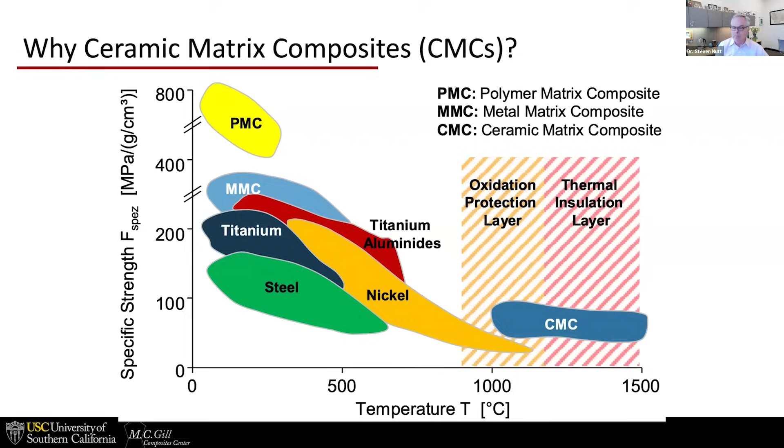And so high temperatures for one. That's one of the main motivators for considering ceramic composites. Now, the specific strength looks not too impressive relative to other material families, but that can be extended upwards at those service temperatures with protection layers, which I'll talk about downstream in this presentation.

All right. I remember many years ago, I worked with a fellow at what was then the United Technologies Research Center in Connecticut. His name was John Brennan. He's one of the early pioneers in ceramic composites. And I still remember, because he said it several times, with ceramic composites, the name of the game is fracture toughness. Ceramics are brittle. Everybody knows that. So they're never going to be used in many applications unless that limitation is addressed.

Now, yes, they're inert. They retain properties to high temperatures, but brittleness is a weakness, and environmental resistance is a plus. If one can impart fracture toughness, boost it even just a little, then that's a real game changer. There are various approaches to boosting fracture toughness with ceramic composites. Surprisingly, porosity is actually an approach, and I'll talk about that downstream as well.

But the most well-traveled approach is what we call weak interfaces. Tuning the fiber matrix interface so that it is strong enough to transfer load, but weak enough to debond and deflect cracks. And then also surface treatments can help boost both toughness and environmental resistance.

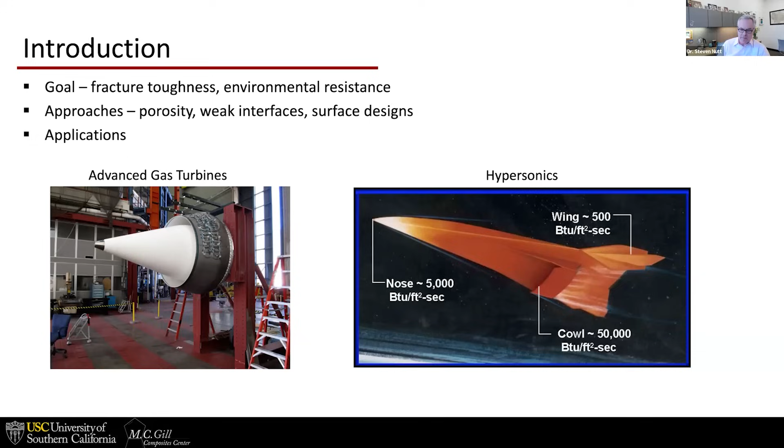I'll talk about applications. One of the best known applications are nozzles for gas turbine engines. The white component there is a ceramic composite. And boy, like gangbusters, the funding spigot has been turned on for hypersonic applications because, well, I think you all know the reason for that. These are vehicles that are going to require high temperature composites, including ceramic matrix composites. There's almost no other way around it. And we'll talk about more of those applications next.

Well, we talk just about applications. Everything sounds wonderful, but we have to also be honest and talk about the challenges and the problems. All right, the three main sectors I'm going to talk about are turbine engines, space applications, think rockets and rocket components, and hypersonics. Another comparison chart showing much the same thing, only this on the vertical axis is material surface temperature. And on the horizontal axis is the approximate time of use, meaning when these materials were introduced and became commonplace in applications.

If you're not familiar with some of those application acronyms: IMC is intermetallic compounds, TBC is thermal barrier coating, FGM is functionally gradient materials. I think everything else people can figure out themselves.

So you can see why there's interest in CMCs, because they're in the upper right of that chart. This is a well-traveled image.

I've used it many times myself. It's just a jaw-dropping example of a ceramic composite being used in the tail section of a turbine engine produced by GE. I'm not sure if it's the Passport or the LEAP engine, but it's called an exhaust gas mixer. You can see the geometric complexity of that part. It mixes bypass air with exhaust air, that's why it's called an exhaust gas mixer.

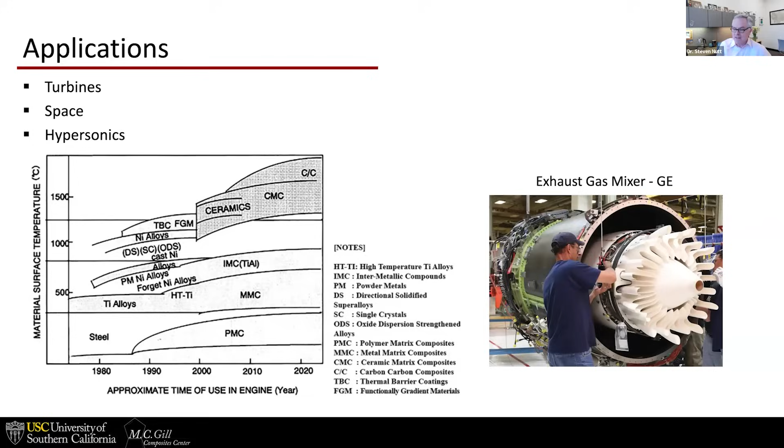That's an aluminum oxide composite—aluminum oxide fibers, aluminum oxide matrix. Produced here in Southern California, by the way. Composite Horizons makes that. We'll talk about the process by which they make it as well. That's kind of interesting.

There have been attempts to go farther than just the tail section of the engine and introduce ceramic composites into turbine blades. That is a bit of a challenge because of the toughness requirement. But this is from GE, and the yellow blades there are the ceramic composites, and they're yellow because of a coating on top of them.

More common in GE engines are other parts. This is the LEAP engine and a part called a shroud. These engines are extremely complicated, but basically there are a bunch of these shrouds that encircle the hot zone.

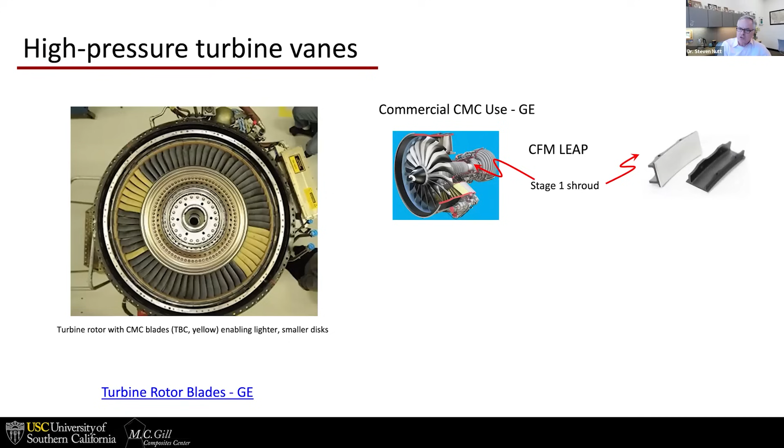This is another part called a combustor liner. So the name suggests, and the position in the engine suggests, these are in the hot zone of the engine. These are not in the warm or the cool zone—these are really in the hottest part.

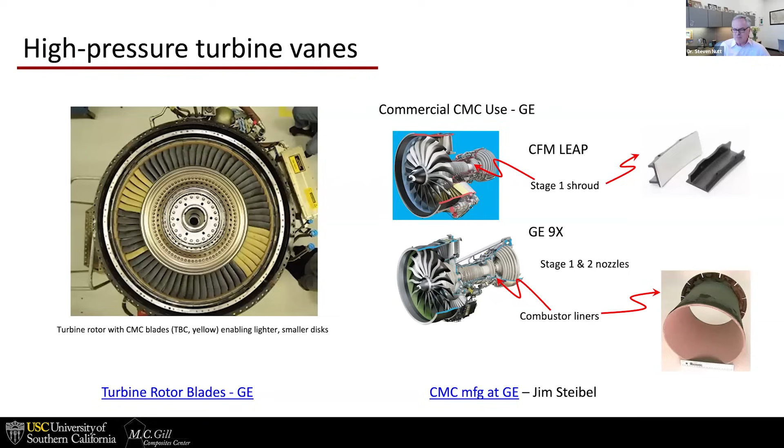GE has made hundreds of thousands of these parts, and they've flown their engines millions of miles. I say that because Jim Steibel said it. He gives a wonderful talk, by the way, and he's now retired, but he gave a nice overview talk of GE's use of ceramic composites.

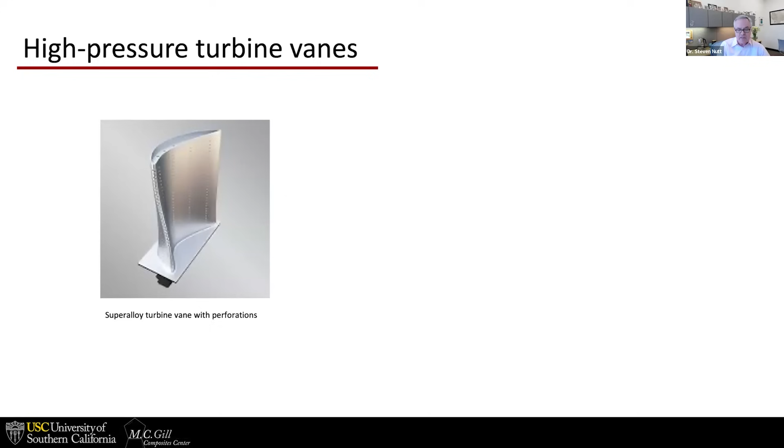Turbine vanes—if you've ever seen one of these things, they're one of the most complicated little parts you'd ever hold in your hand. It's about a few inches in dimension. You can see all the perforations, the compound curvature, the flanges. These are typically made from nickel-based superalloys.

Now, if we try and introduce ceramic composites, there's kind of a hybrid approach outlined here. This involves a ceramic composite plus metal component plus environmental barrier coating and thermal barrier coating with monolithic silicon nitride—just about every class of material imaginable.

This is an interesting little sentence that I lifted from the literature. I thought it was interesting because, well, I assume they're still called United Technologies, although I know Pratt Aerospace has been sold to Raytheon, and I'm not quite sure how that works out. They tested high pressure turbine vanes using a combination of these materials, and you can see this is a route they are pursuing. This quote is fairly recent, within the last 5 years.

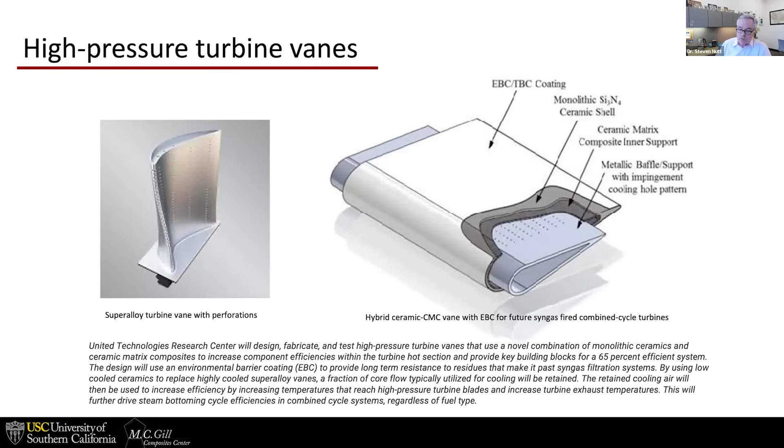And in aerospace parlance, that's fairly recent. So coolant is going to be involved, coatings will be involved, multiple materials will be involved. Okay, now that was turbine engines. Now we turn the page to space.

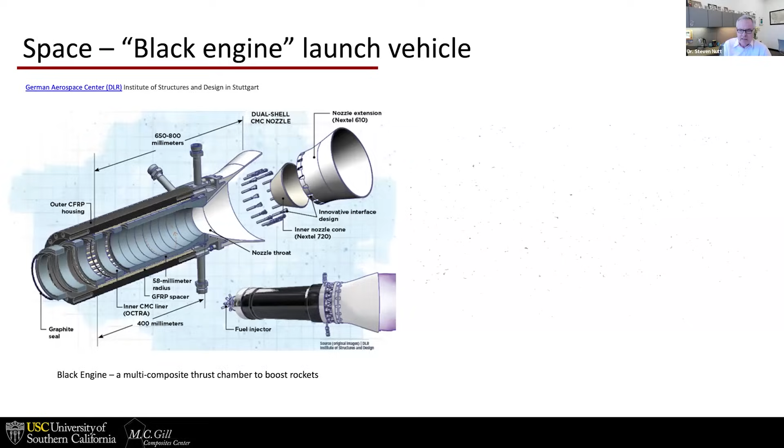This is a little article lifted—you could probably recognize this, it's from Composites World. This is a so-called black rocket engine, and it's interesting because of the multitude of different materials used in the design. They actually are using what is often considered a defect in composites as an asset, a feature—and that's porosity. So they're trying to make a microporous carbon-SiC CMC for transpiration cooling.

This is German work. Let me see if I can switch here and get the audio from this. Okay, it's just about a minute, but it is kind of entertaining and gives me a chance to catch my breath.

Passive cooling. Supply of coolant. CMC liner for transpiration cooling.

Dr. Nutt, we're not seeing anything. Oh, I'm sorry. Let me try again then. Sorry about that. Seeing this now? Sorry, sharing. Nope, not yet. Still can't see anything. Okay, start again.

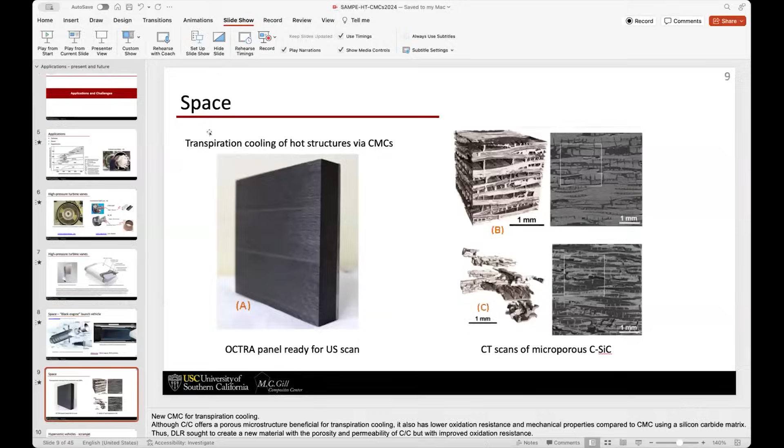We're still not seeing anything yet. I don't know if you have to hit share screen and choose the actual button. Okay, I'm just going to abandon that and go on, because that was a really cool video, but I'll have to figure out some way to get that in next time. Still not seeing anything. Dr. Nutt, you need to share your screen again. It unshared your screen. Sorry about that. We can get the link from you in the future for the video and potentially share that with everyone. Yes, see, that would now work. Yes, you see it now. This is good.

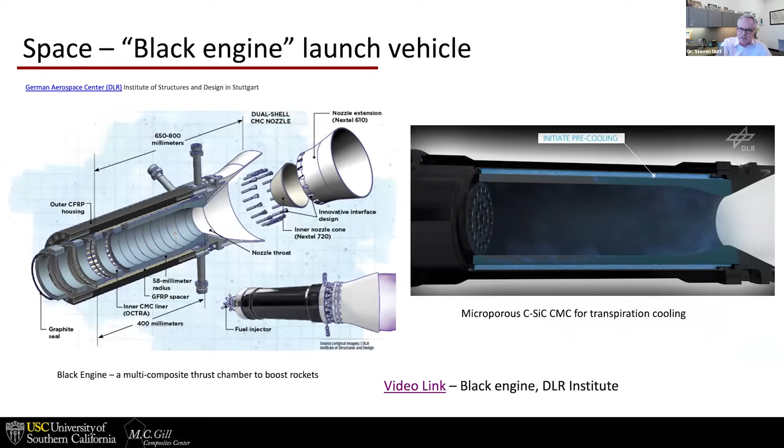Sorry. All right, so this is where we were last time. I'm going to be talking about this blue material in the graphic on the right. It's a microporous carbon ceramic used for transpiration cooling. And there's an actual image of the material.

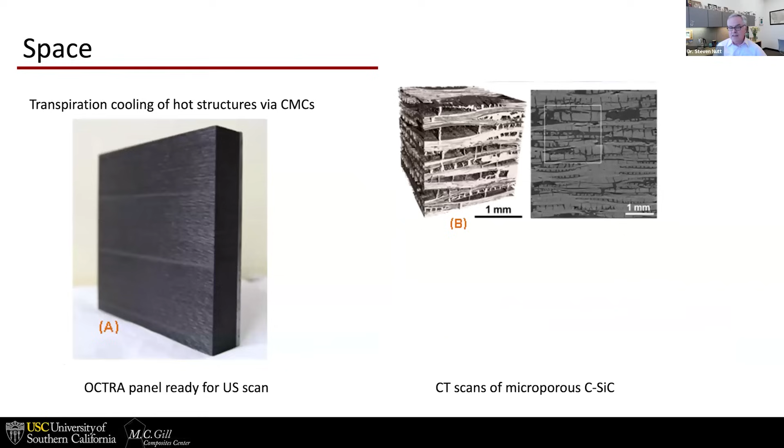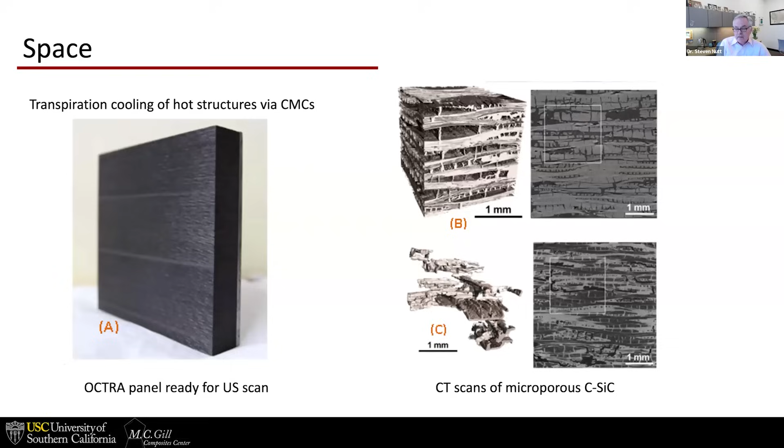Next, this is an X-ray CT image showing - it's really almost Swiss cheese. It's that way by design, to deliver the coolant fluid to the assembly, so they've turned what is normally a defect into a feature, I guess. Here on the lower left shows the interconnected pore network for this CMC material, and that's an unusual application - the first one I've seen where they're actually trying to use it to deliver a coolant. And of course, this material also has to withstand substantial heat as well.

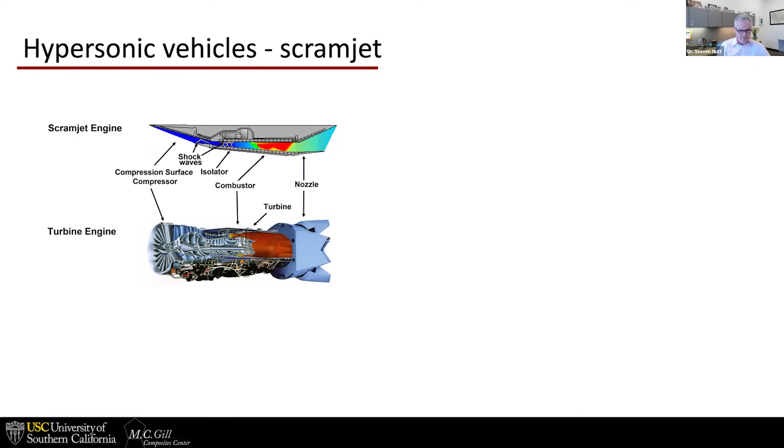Now, turning our attention to the last area of application, hypersonic vehicles. One of the engine types being considered for hypersonics is called a scramjet. What I did there is put two graphics, one for a turbine engine, one for a scramjet engine, to show that there are parallels, even though they look very different and actually are quite different. But there are combustors, nozzles, and sort of a compressor or compression surface.

It's difficult to get actual images of the actual engines of these vehicles, but there's a big effort to combine these two engines, because a lot of the vehicles will be much more versatile and useful if they can fly at different speeds, not just hypersonic speeds, and that requires multiple modes of propulsion, both of which will use ceramic composites.

Okay, so this is a quote from David Glass of NASA, who's leading a long effort there: moving beyond insulated aluminum airplanes to a vehicle with multiple thermal protection system and hot structure approaches.

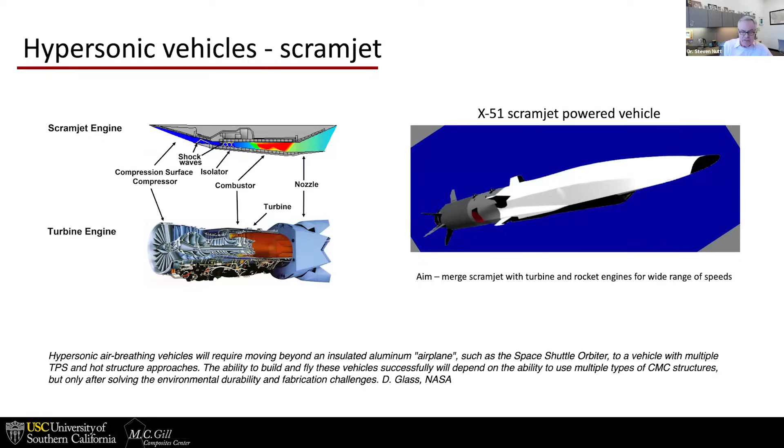Okay, so now we have to open the Pandora's box. It's not just CMCs, it's TPS and EBCs and other coolants and so forth that are going to have to be employed to make these vehicles fly. Now, I mentioned some of these acronyms - EBCs, environmental barrier coatings, and TBCs, thermal barrier coatings. TPS is thermal protection system.

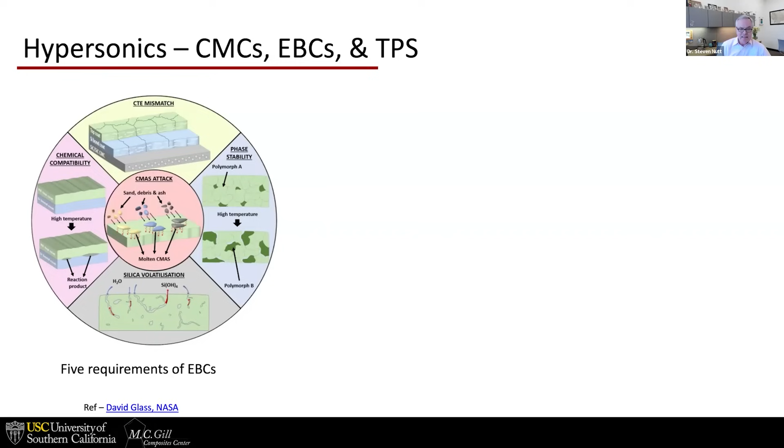All right, this is a nice graphic showing the 5 things these coatings have to protect against, and it is a very tall order: chemical compatibility, CTE mismatch, dissimilar materials, phase stability at high temperatures - and for a lot of these materials in these systems, they're silicon-based and produce silica, and the silica can volatilize, particularly in the presence of humidity. In the center is something called CMAS, which most of you are probably familiar with. Basically, that's dirt - it stands for calcium magnesia aluminosilicates, the primary ingredients of airborne particulate, i.e. dirt. That causes problems for ceramic composites. It ends up floating into the engine, where it ultimately melts and becomes a dangerous reactant, essentially.

If you thought things were complicated, look at some of the schematics in the literature for approaches to dealing with these 5 challenges in the circle on the left. This is the structure of a coating to be put on top of a ceramic composite, silicon carbide composite, and it's presently in use. The silicon at the bottom is effectively just a bond layer.

If you're like me, and this is the first time you've seen it, you probably can't even remember what YB stands for - that's a rare earth element, ytterbium. The DS and MS are disilicate and monosilicate. So these are dual layer coatings on top of silicon with a thermally grown oxide on top of that. Holy cow.

The danger here are the things floating around in the atmosphere, water and oxygen, and how they can react with these compounds.

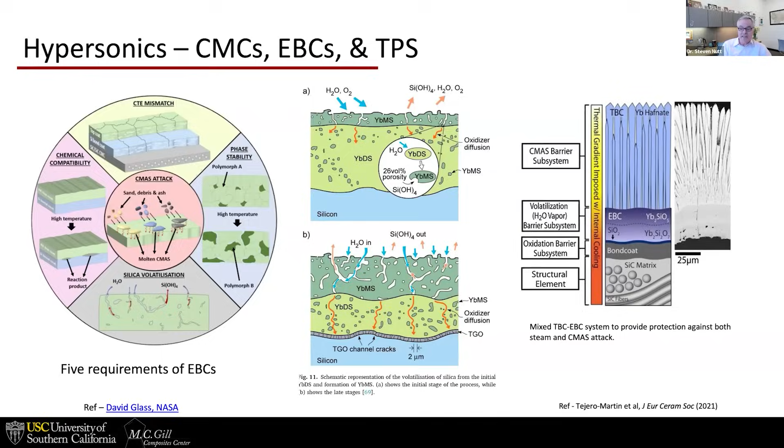There are even more elaborate approaches that involve not just the environmental barrier coating in A and B, but a thermal barrier coating on top of that. As the box indicates, that's a CMAS barrier, below that is volatilization protection, and below that oxidation protection. This is state of technology today, from a 2021 review article.

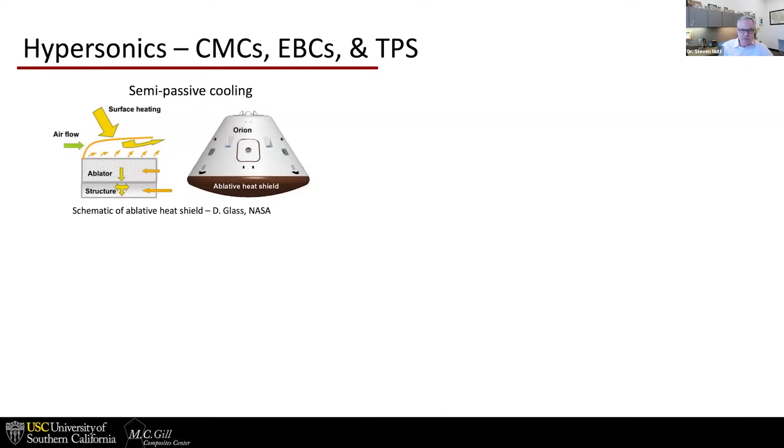Let's turn our attention to the last acronym, TPS, the Thermal Protection System, which has been in use for a long time. Everyone has seen these things. They're ablative shields, single-use protection, typically used on re-entry vehicles, often phenolic-based composites that char, and the char protects sufficiently long, then they have to be replaced.

This is a TPS being made, produced before launch. You can get a sense of the scale there.

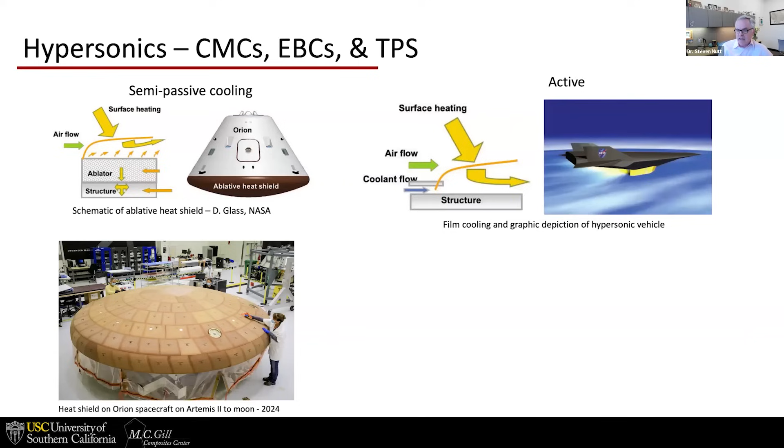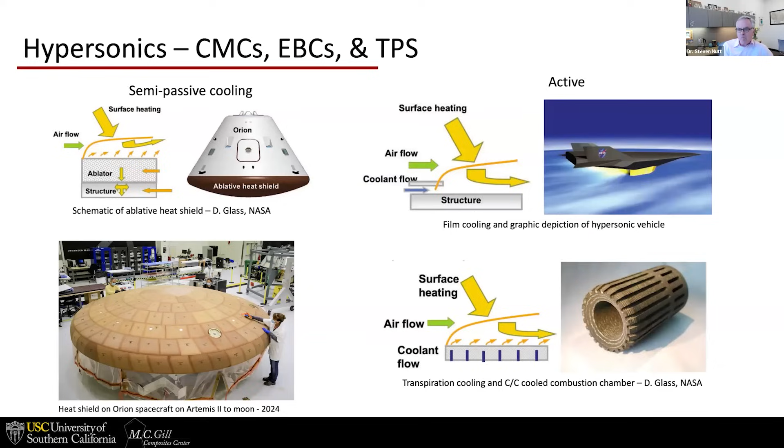There are other approaches that have to be used for cooling and protection. The TPS on the left is semi-passive cooling. For hypersonic vehicles, they will require active cooling, meaning circulating a coolant - see the blue arrow in that diagram. The last one is transpiration cooling, used in the German rocket design, where you're basically flowing coolant through a component of the structure. Those are three different approaches to cooling materials and managing the heat.

How do we make these ceramic composite materials? There's about 5 different answers. The first one that's been around for quite a while is known by two acronyms.

The appeal is particularly low cost. The cost of these process routes is generally quite high, and this is probably one of the lowest cost routes. The problems or challenges: the porosity is not very well controlled, nor is the composition, particularly residual silicon, which is a low melting component in this assembly, and that's going to be a problem. It's difficult to get all of the silicon to react to silicon carbide.

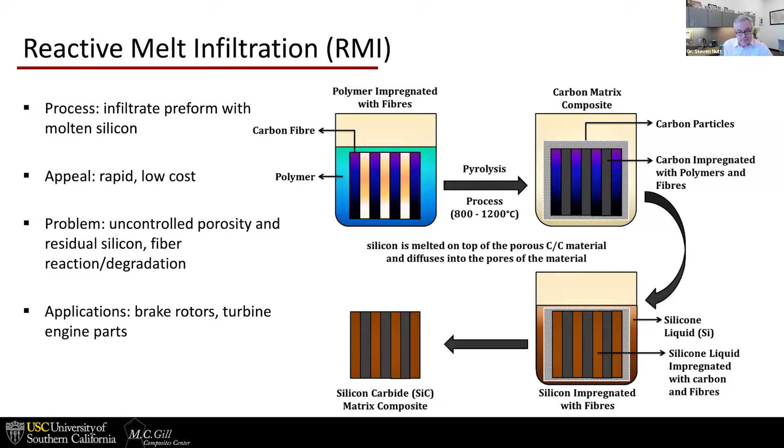For one, they don't produce any brake dust when they wear. They last multiple times longer than cast iron, and they're much lower density. Of course, they're higher cost, but anyway. Turbine engine parts are also made by this process route.

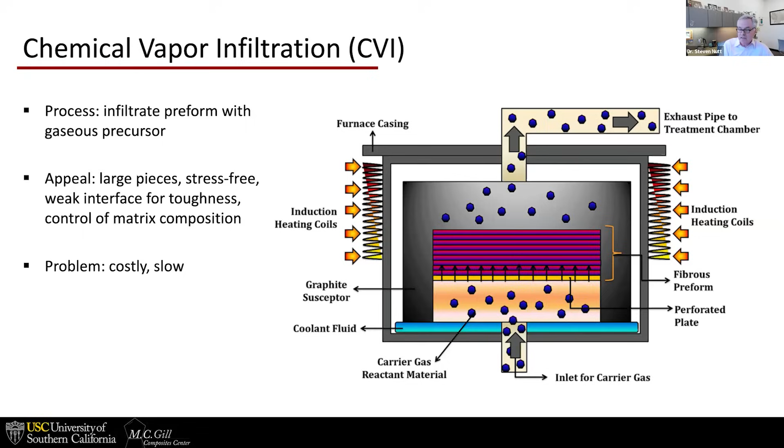A second process route is CVI, chemical vapor infiltration. The appeal is you make large pieces with very good control of the matrix composition, unlike reactive melt infiltration. This is basically chemical vapor deposition, but it's chemical vapor infiltration into a fiber preform. The challenge is it's costly, very slow, with closed porosity - levels between 5 and 10% are common, and cycle times are days, not hours, like 5 days, 10 days.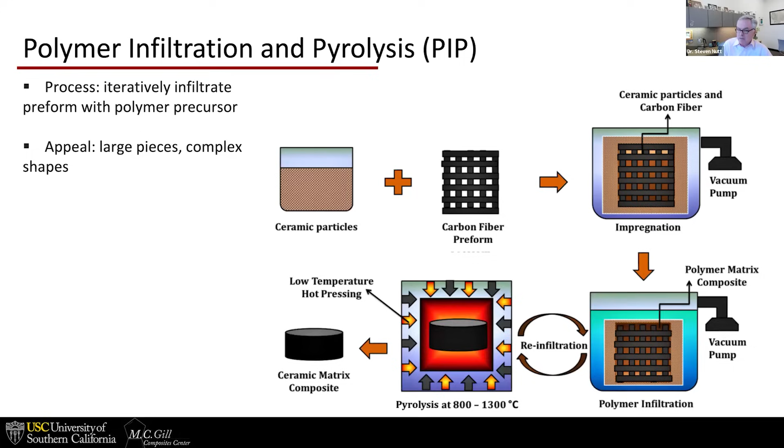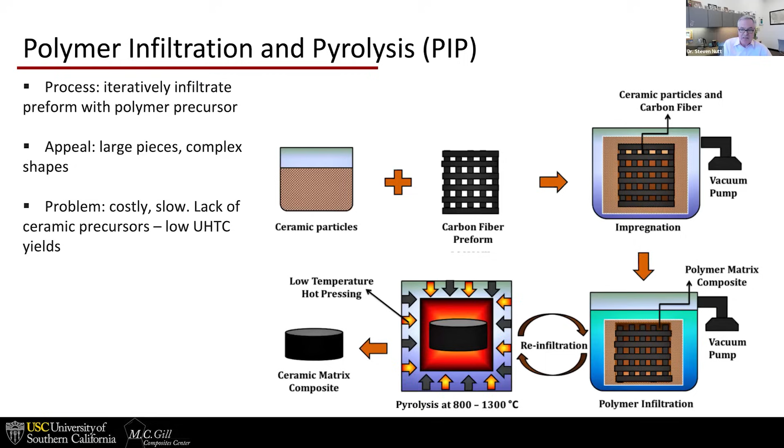PIP, polymer infiltration and pyrolysis, is an iterative process used for carbon-carbon composites for a long time. Basically you start with ceramic particles and a fiber preform, blend these things, impregnate with polymer resin mixed with ceramic particles, and then pyrolyze to produce a CMC. Again, because it's iterative, it's slow, with closed porosity upwards of 5% typically. Oftentimes, the number of PIP cycles used is anywhere from 3 to 6, and each cycle can take over a day. This is the process route used for the exhaust gas mixer.

Basically, it's a very simple one, and that's part of the appeal. We start with oxide prepregs, also produced here in Southern California by Axiom Advanced Materials. Composites Horizons uses their prepregs to make the parts. It's basically just pressureless sintering in air. The appeal of an oxide fiber, an oxide system, is you don't have to worry about oxidation.

You can see it goes through a lot of the same process steps that a polymer composite goes through, because you're making prepreg essentially, laying up the prepreg, and vacuum bagging it. Even, okay, we use the term cure - it's not really cure, but what comes out of the autoclave is a green state ceramic that can hold shape. And then it's subsequently sintered in a really big furnace.

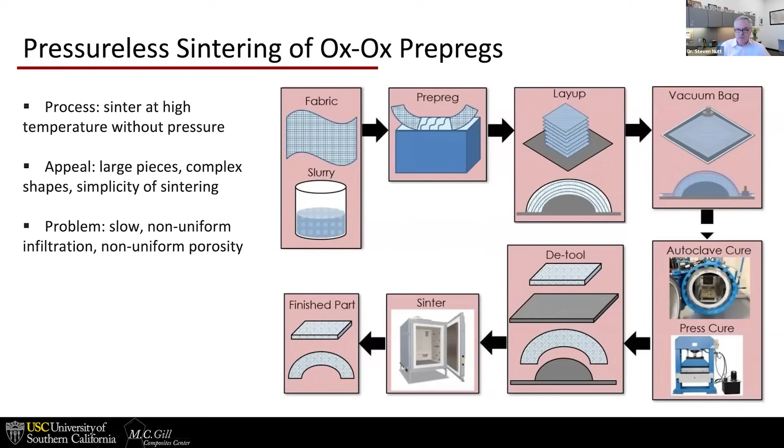There's the problems: it's a non-uniform infiltration of the ceramic slurry and non-uniform porosity. Okay, talk about that in a minute.

A fourth process route is just pressure-assisted sintering. There's two variants. One is very well known, and that's hot isostatic pressing. The second one is maybe less well known, field-assisted sintering, commonly known as spark plasma sintering, where an electric field is applied during sintering, either DC or AC, and that greatly accelerates the densification process down to minutes. So that's a huge appeal right there.

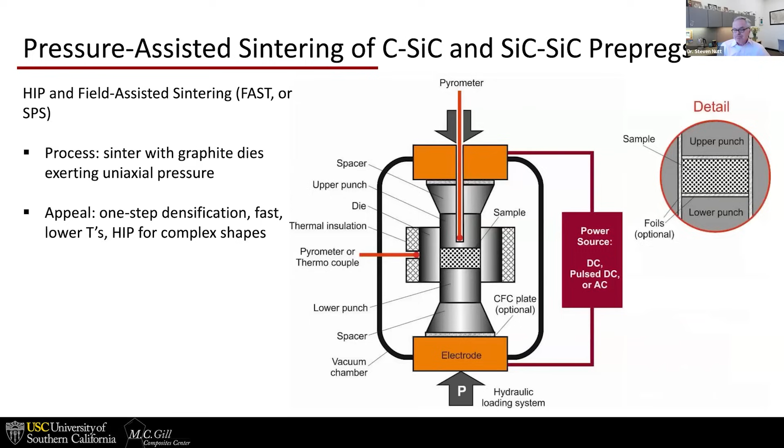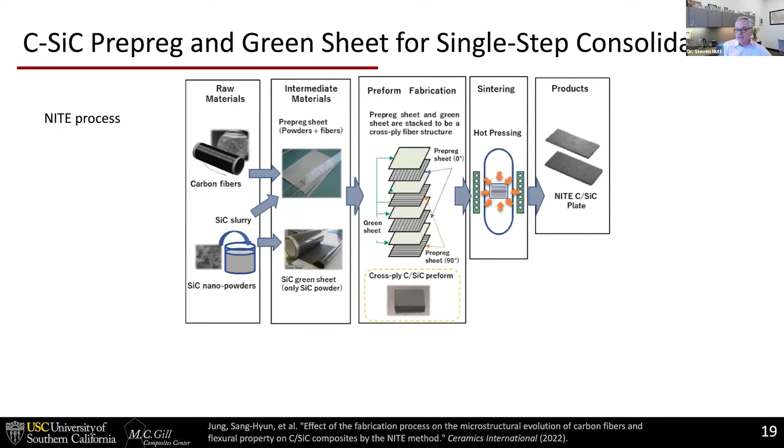In any press operation, there's going to be size and shape limitations. This is an interesting variant developed by a Japanese company called NITE, for nano infiltration, nanoparticle infiltration and transient eutectic. I'm not going to try to explain all that, but basically it's infiltration of a slurry into fibers, just like the previous slide, but different constituents here - not oxide. Now we're talking about silicon carbide nanopowders. Then layering up the plies, just like you would with prepreg, and hot pressing, to form either carbon-SiC or SiC-SiC plates.

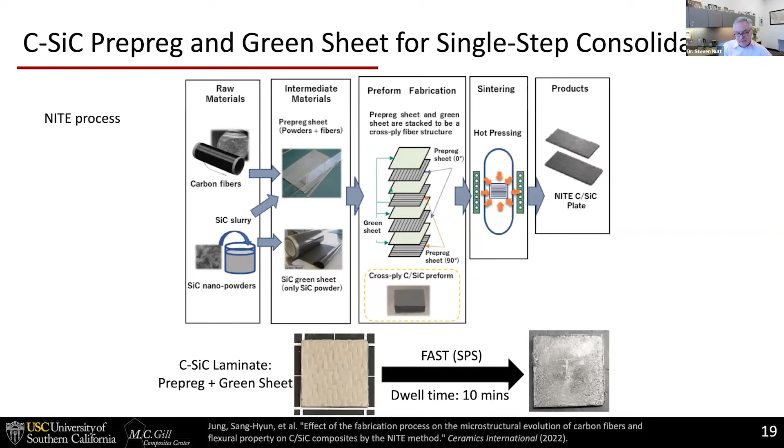This process is relatively slow, but well established and widely used, versus the FAST or SPS process, where you're talking about densification in a matter of minutes.

And finally, I'll talk about analyzing CMC microstructures. Here's that well-traveled schematic showing the principle of fiber toughening by interface crack deflection. So you can see, tuning the interface microstructure and properties to achieve this type of behavior is critical to imparting toughness. Here's an example of a crack in an oxide composite deflecting around fibers, and that's actually a good thing - you want that type of behavior.

Porosity, though, as it turns out, is a difficult thing to quantify, in terms of a single number not adequately characterizing porosity. You can say the porosity is X%, but that doesn't begin to tell the full story because there are different types of porosity, different shapes of pores, different sizes, different locations - it's a big undertaking, but it's important.

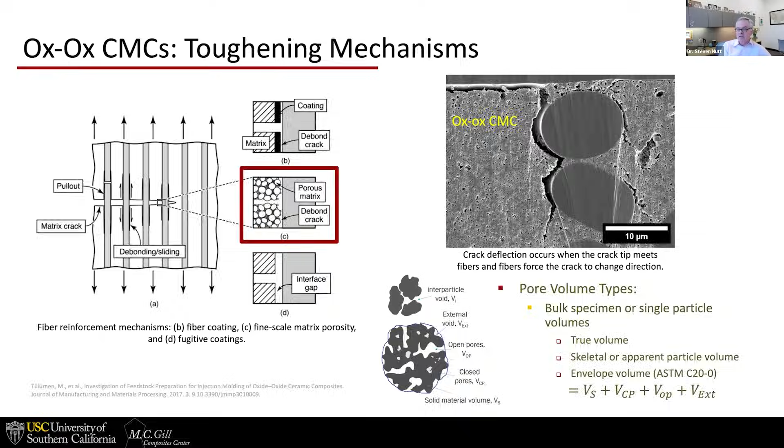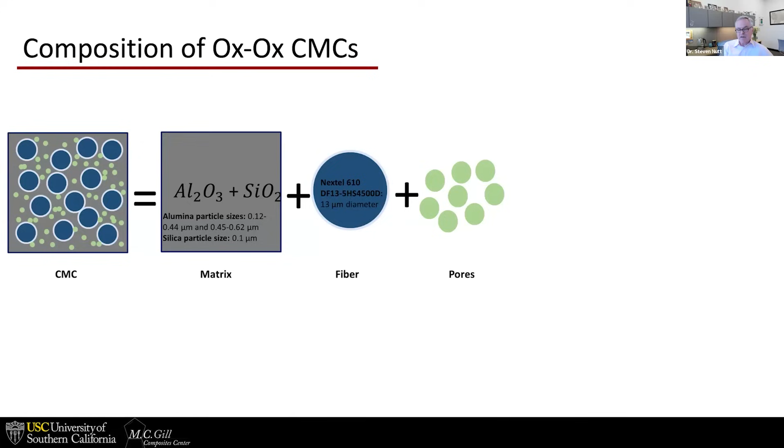So pores are part of the microstructure. Now the pores have a wide range of sizes, and therein lies part of the challenge.

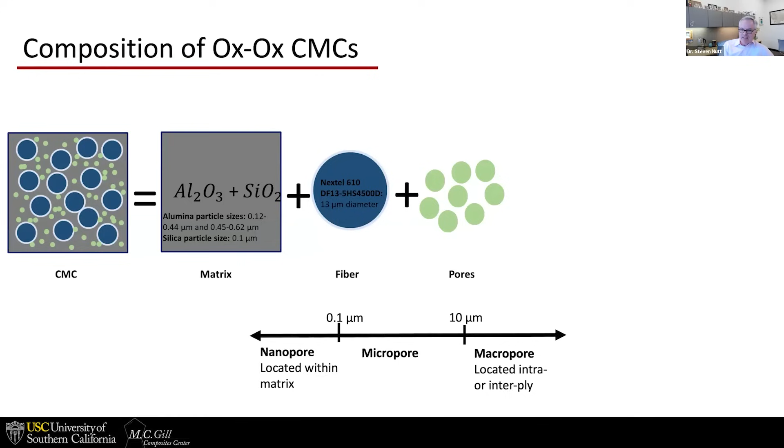Sample preparation is typically a 10-hour production cycle, at temperatures of 1,000 to 1,200 degrees C.

This is a series of micrographs showing increasing sintering time top to bottom, and left to right is increasing sintering temperatures. You can see these are kind of difficult measurements to make because porosity is an elusive and multifaceted quantity.

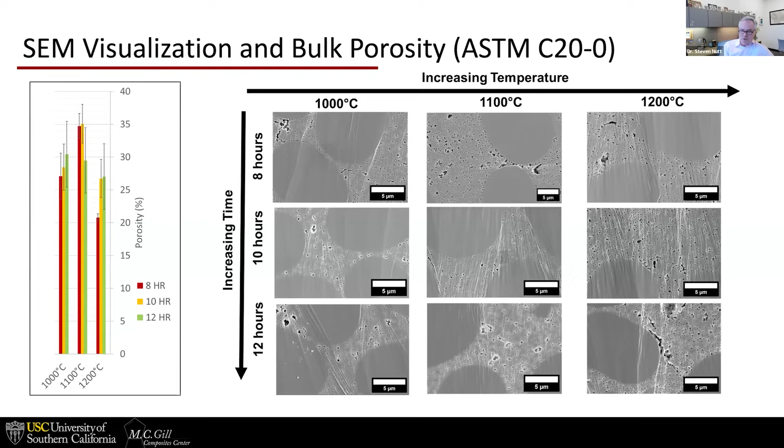So there's a lot of scatter. Here, 8, 10, 12 hours at 3 different temperatures and not a whole lot of difference, with large error bars on all the measured values. But you can see porosity in each case is upwards of 20%. Okay, this is not polymer composites where you reject parts because of more than 1 or 2% porosity - this is what flies on engines with 20+% porosity.

We can begin to understand the three-dimensional nature of the pores by volumetric imaging, X-ray CT, and what you see on the left here is images of pores. Pore volume is color-coded, so yellow is larger volume than green, which is larger volume than purple. Then on the bottom is frequency on the vertical axis and volume on the horizontal axis. You can see that one pore might actually account for a fairly large fraction of the overall porosity if it's sufficiently large.

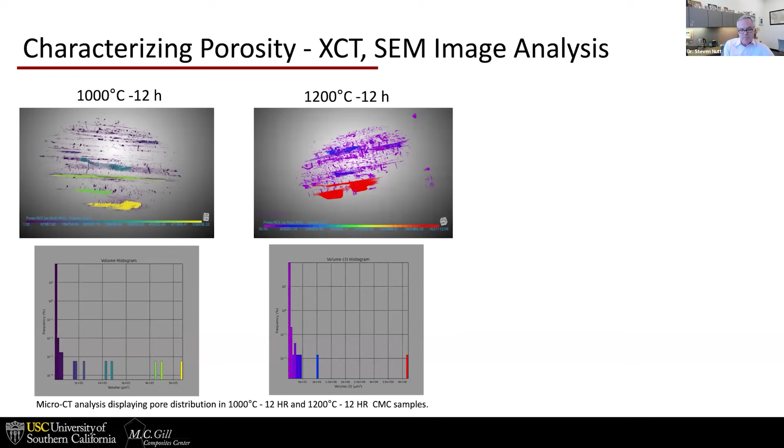This is a higher sintering temperature, same sintering time. You can see the pore sizes and pore shapes - they tend to be quite elongated along the fiber directions, which is not too surprising.

These images on the right show what porosity looks like, this is the type of porosity we want to achieve by design. This is not a problem, this is actually what we call good porosity. This is some statistical distribution of the pore diameters. These pores tend to be relatively equiaxed.

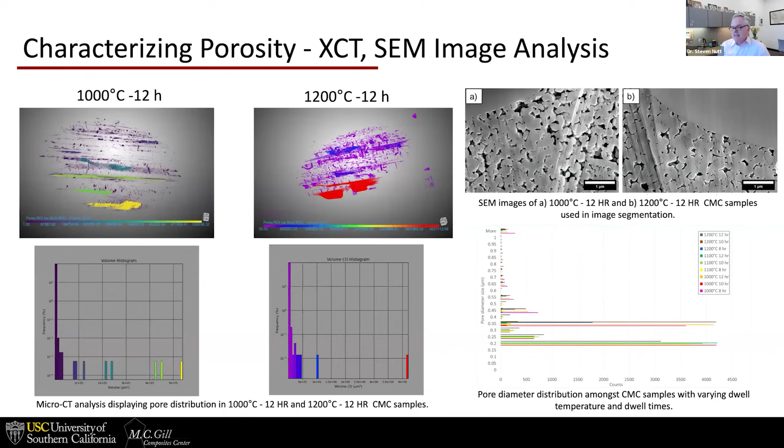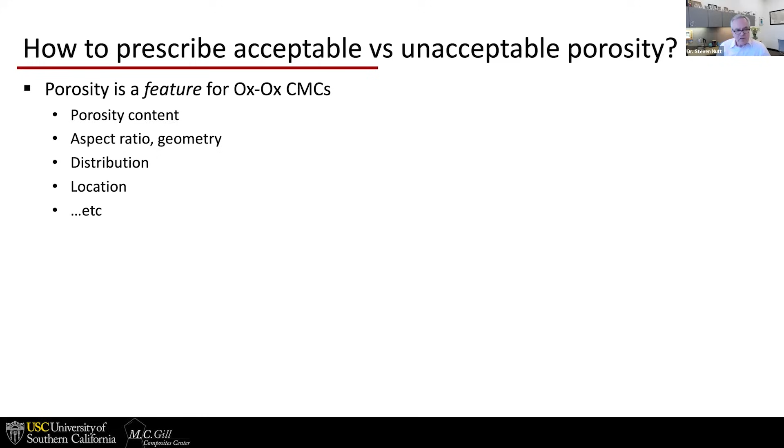But this is a dilemma. This is an open question right now, and I don't think anyone yet has the answer, because porosity is a feature of these types of composites. But it has aspects of not just how much volume, but the aspect ratio, the geometry, the distribution, the location, and it goes on and on.

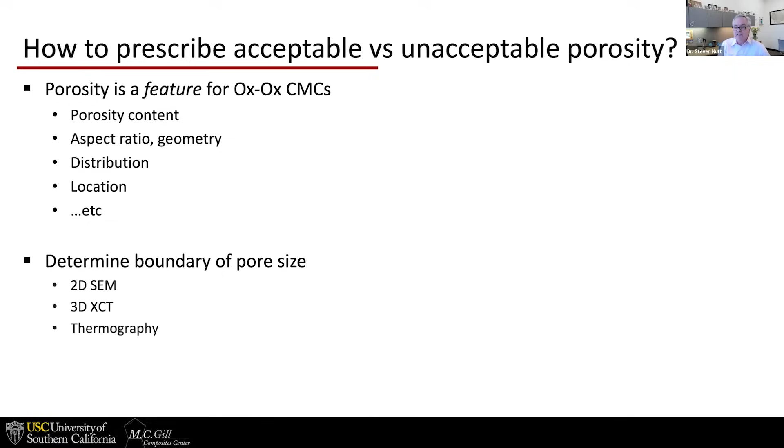So just getting a handle on some of these questions requires a lot of work, not just two-dimensional SEM imaging, but volumetric imaging. Thermography, although it has much less resolution than the other techniques, is useful for a global sort of distribution of porosity. Now we're going to turn our attention, I need to get finished here pretty soon, to a much more common application.

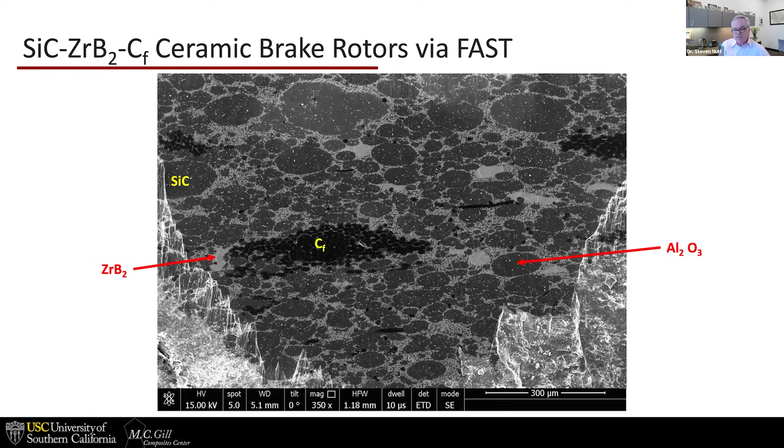This is not really a homogeneous distribution of phases. The carbon fibers, the big sort of islands are silicon carbide, and in between the islands are predominantly zirconium diboride. The little white flecks that you see there are not surface dirt, that's actually alumina yttria sintering additives.

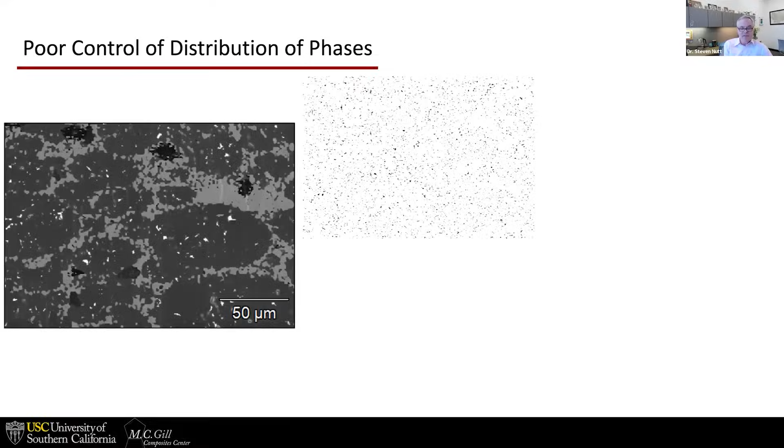At greater magnification you kind of see the sintering additives in white, the zirconium diboride in gray, and the darker region is silicon carbide. The few little black islands are what remains of carbon fibers. You can see the map of carbon there, and you can correlate that with the image on the left. There's silicon carbide, this is just a composition map, and the zirconium diboride.

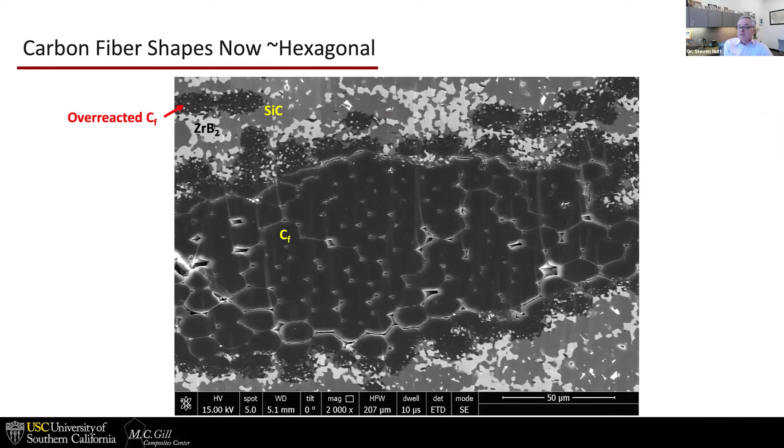Looking at the carbon fiber bundles, actually the fibers have sintered together. You can see they're no longer round, and in fact they actually have some sort of faceted boundaries where they fused together. In the upper left, you can see that the fibers that are isolated by themselves have actually reacted with the matrix component. The bad actor here is zirconium diboride, it really attacks the carbon and reacts pretty strongly with it. That's not necessarily a showstopper for brake rotors.

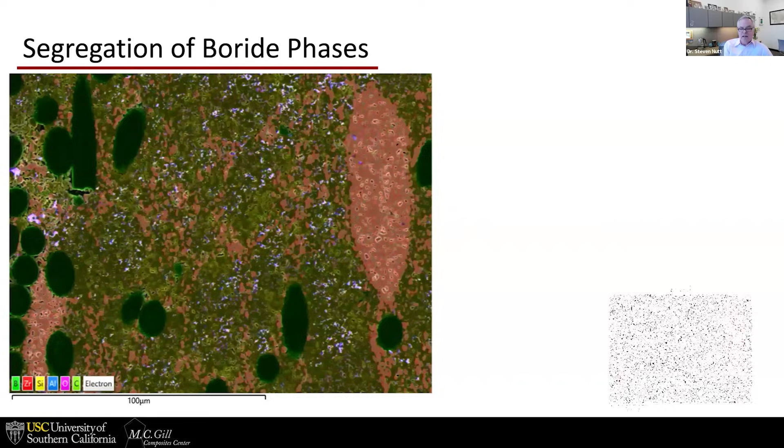More composition maps, I call it in this slide segregation. I'm not quite sure how to discriminate between segregation and inadequate mixing, we're trying to deal with that right now. I'm beginning to think it's just inadequate mixing of the powders to start with.

Just more maps: zirconium, carbon, boron, oxygen, silicon. All right, one of the challenges with any composite is how do you measure the uniformity of the phase distribution?

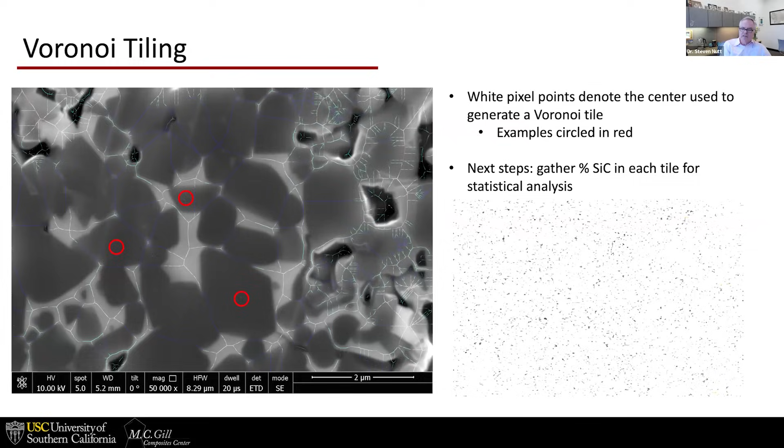You can look at it, and by eye say well, that's more uniform than this other section on the left. But there are ways to quantify this, and it involves some tools, tiling or tessellation tools, where you subdivide the microstructure into small regions. This is one type of tessellation called Voronoi tessellation, and that will enable us to actually measure how uniform the dispersion is in different iterations of the production.

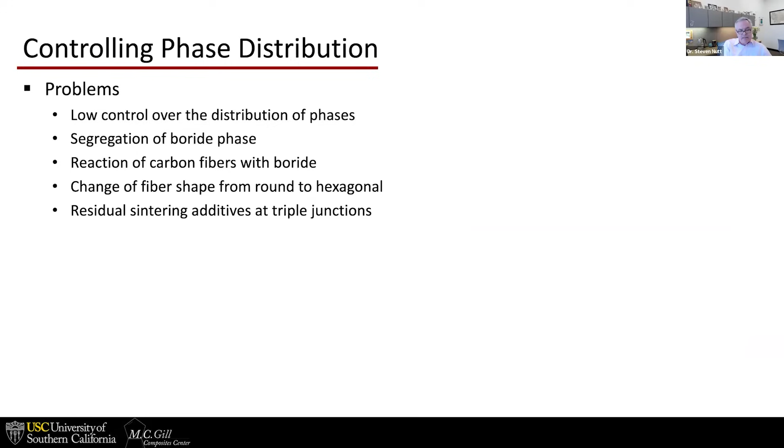Controlling phase distribution is really important, that's something that vendors have to deal with. There are a lot of different ways to go with this, and different fiber forms to play with.

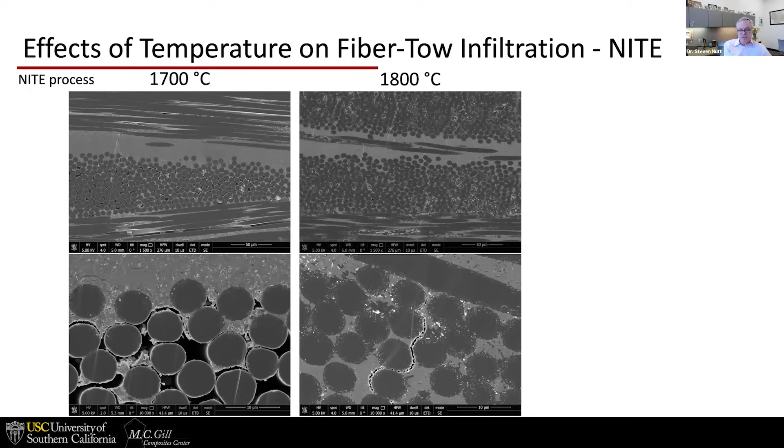And finally, we're going to talk about the nanopowder infiltration and transient eutectic approach, which has basically been licensed by Axiom, and they're using it. But we're looking at the effects of temperature, sintering temperature, on the infiltration and distribution of phases in the structures, to try and guide the selection of process parameters.

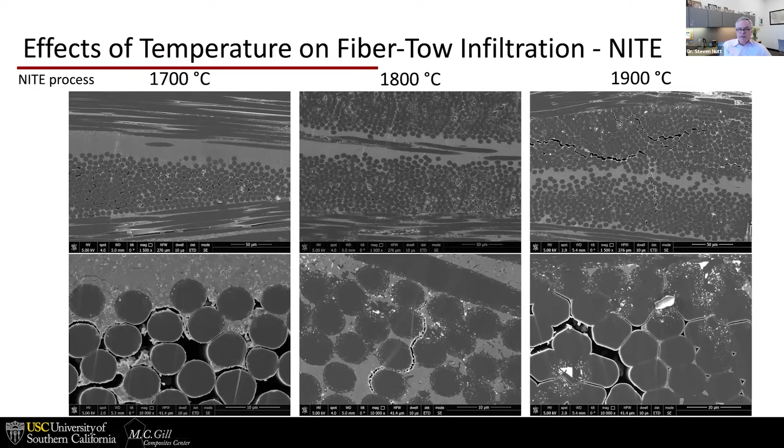This is basically a big task, there's no manual to tell you what to do here. You've got to go through these steps.

One of the things with this so-called spark plasma sintering or field-assisted sintering is carbon fibers react, and they react quite a bit. For load-carrying applications, this is going to be a problem. These fibers are uncoated, they will certainly require coatings to prevent this type of reaction.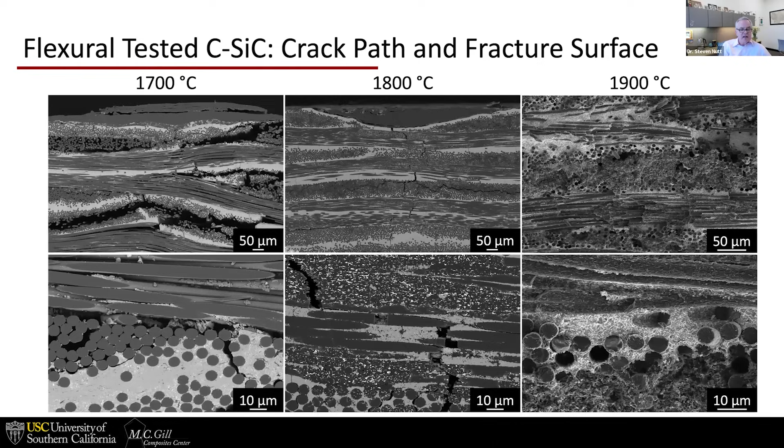But the result of all of this preliminary work has been to identify a process temperature, a sintering temperature, that seems to work better than others. Actually measuring the interface strength is a really important challenge, but a very difficult thing to do.

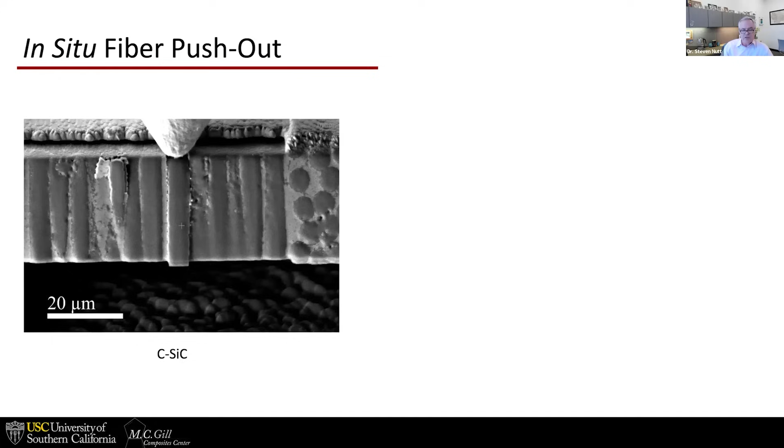One of the approaches that we've used is basically fiber push out. We used a focused ion beam to machine trenches underneath these little ledges here and machine a very smooth flat surface so that we can use a flat bottomed indenter to push out individual fibers. We use the SEM imaging capabilities to position fibers directly under the indenter.

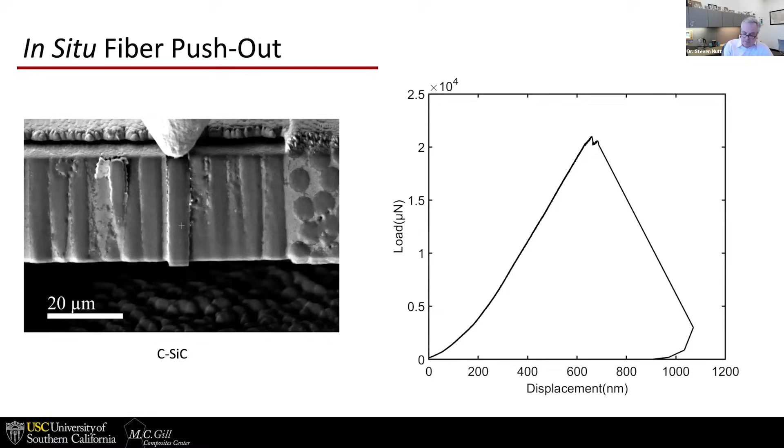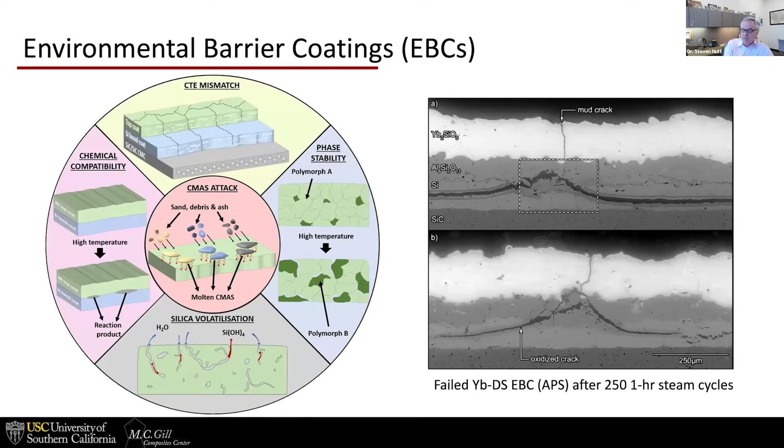When we measure load versus displacement, we can then use that as a tool to discriminate the effects of different fiber coatings, different process histories. I'm not going to say a lot about this. The coatings are a big part of this, and believe me, groups at Oak Ridge, at GE, and elsewhere have spent a lot of time on these coatings. It is an aspect of ceramic composites that has been worked on extensively and will continue to be worked on for quite a while, because these coatings are a way to boost the service temperature.

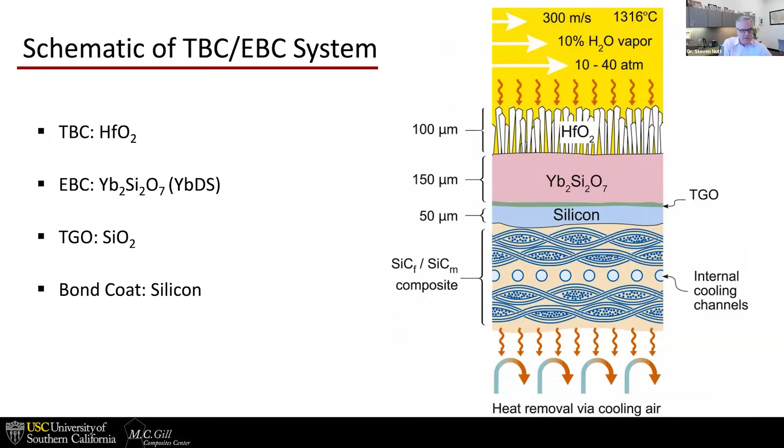Unfortunately, it's a real Pandora's box. Once you start applying coatings, coatings on top of coatings on top of coatings, it's very, very complicated and costly, as you might imagine. Rare earth silicates are basically the compounds of choice right now, but you can see there are other components to the surface treatment there as well.

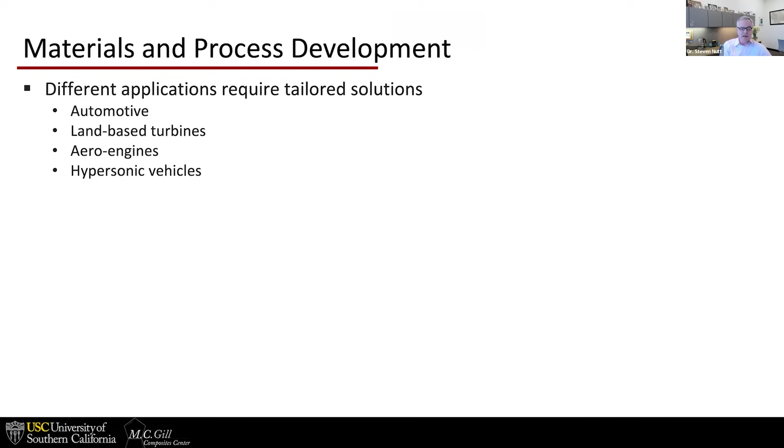All right, let's wrap up here. This is what the landscape looks like for applications in the next 5-10 years. Some of them are relatively mundane, I would say, or very common, the automotive applications. Others are more exotic, rockets and hypersonic vehicles. New materials, refined process tools, and I think we're going to start to see the use of computational materials science tools to try and identify compounds that will extend the service temperature and service life of these materials.

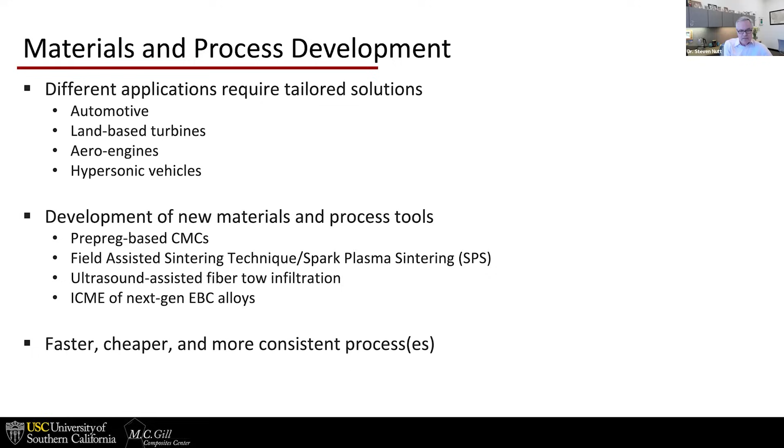Yeah, the big thing is cost. These materials are quite expensive. Even for composites, they're very expensive. I'll wrap it up there.

Thank you. Thank you, Dr. Nutt. This was a very wonderful presentation. We do have some questions in the Q&A. Oh, you got an applause button. Look at that. All right. Sorry, that's very loud out here.

Our first question is from Motoshi: is there any manufacturing method that is preferable for making smaller structures, and any method for a larger structure? Yeah. Personally, I think for cost, reactive melt infiltration beats all the others at present. I think for small parts, field-assisted sintering is very fast and is compatible with small parts. Complexity of geometry, though, would mean that tooling would have to match or provide the geometric complexity.